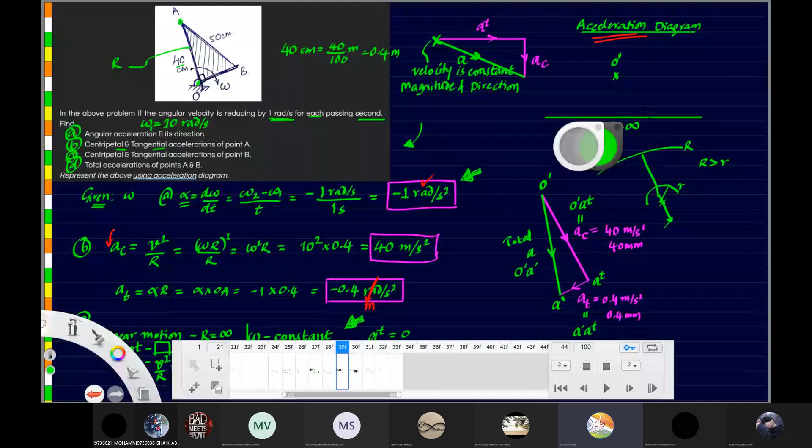Fine. So after lunch, is the strength very low every day? Only 10 or 9 students have joined. Yes, sir. Some students forgot that they have a class. Students don't know they have class. I've shared the link on WhatsApp.

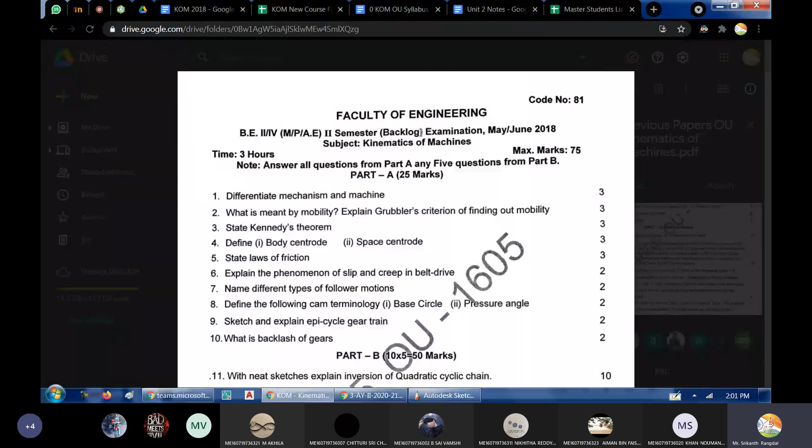Okay. So this is the question we are taking up from the question paper 2018 May June, and this appeared for backlog students. And considering this is for backlog students, the question is not that simple. Fine. You'll have to think properly, and only then you will be able to solve it. Let me take a snap of this question. You can see it's for 10 marks.

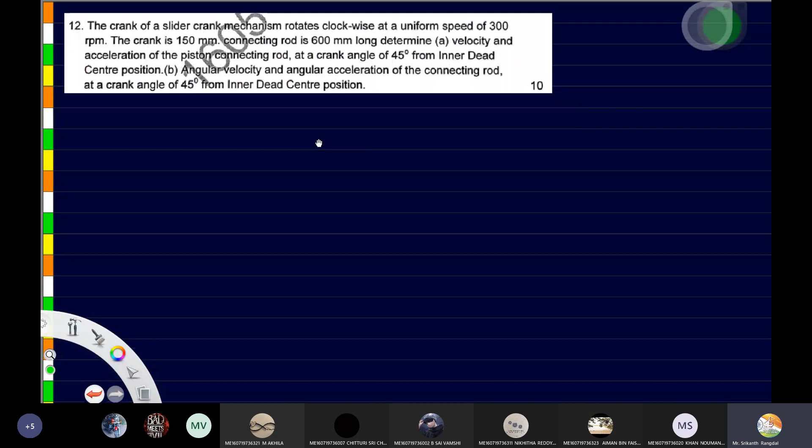So this question, I'll just keep it here. Okay. Remove these two things. Let me just push them to the corner. I'm not using them much. And yeah. So this is the question here. Ready? Needs just slightly to increase this thickness. Right. So what is given here? What is given here?

The crank of a slider crank mechanism. So you have already seen what a slider crank mechanism is like, right? There is a crank which rotates a complete 360 degrees, and this is connected by help of a connecting rod or coupler. It is connected to the slider. The slider will be sliding inside the cylinder. So this is how it will be connected, and the cylinder here will be fixed.

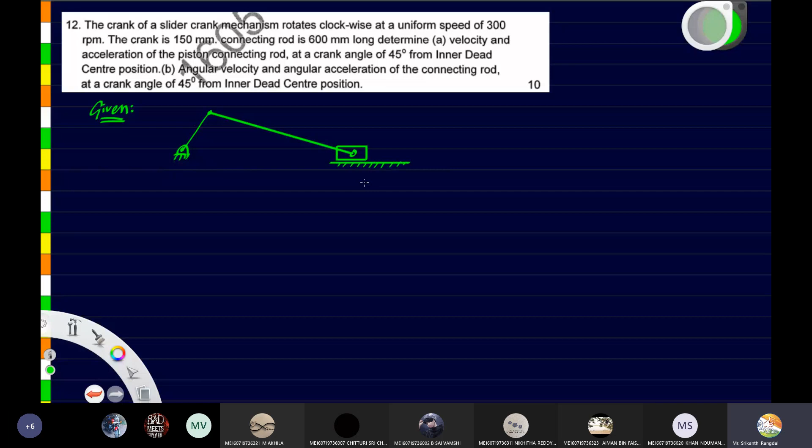So this is how we show the cylinder, and when you're counting the links, you have to count the fixed link as one. The second is the crank. Third is the coupler or connecting rod, and the fourth is the slider. So one is the cylinder, or you can also call it the frame, the fixed part. The second? Crank. The third is called coupler or connecting rod, and the last, fourth, is a slider. So this is how the slider crank mechanism looks like.

And then he's telling it is rotating clockwise. Clockwise means in this direction, and at a uniform speed of 300 rpm. So n value has been given, 300 rpm. Crank length has been given, the length of link 2. If you give the names of each point, I'll call this point S. So OA length has been given. How much is OA? 150 mm. And then the connecting rod or coupler, that is link number 3, AS, is given as 600 mm.

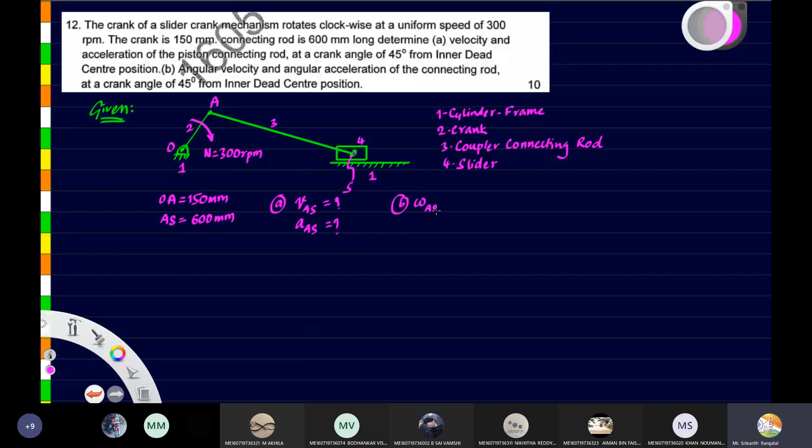And we have to find the velocity and acceleration of the piston and connecting rod. So we have to find velocity of A with respect to S and total acceleration of A with respect to S. These are the two things we have to find for the first bit. Second, he is asking the angular velocity and angular acceleration of the connecting rod. So for the B bit, omega for AS and angular acceleration alpha for AS. Okay, so this is the question. Did you understand? Any doubts here?

Now the angle at which he's asking us to do that is 45 degrees. So from here, the angle is 45 degrees, and at 45 degrees he is asking us to find these values. Okay, ready? Yes, sir. Okay, so we will again use the graphical method to solve it. Just open AutoCAD. Don't worry about the commands, okay?

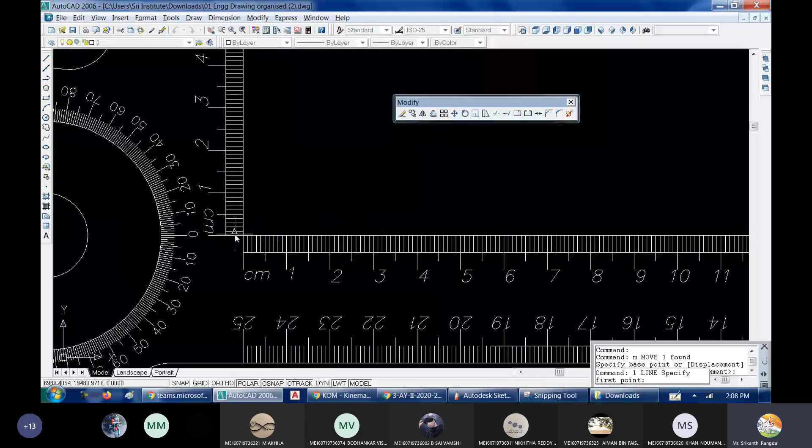Fine. So because you'll have to use the drawing instruments, I will just take up this drafter. Is this visible clearly? Yes, sir. Okay. So this is the one I don't want. Let me check the question once again. So this is our diagram. Let us start drawing it. First of all, I'll draw a horizontal line. Next, I'll have to draw this at what angle? 45 degrees, right?

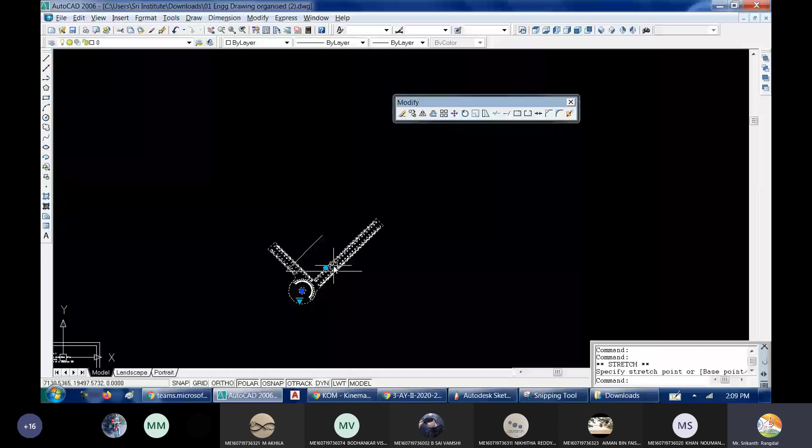So I'll take this drafter at 45 degrees. You can even use the protractor. Keep this at 45 degrees and draw a line. So what is the crank length? 150, sir. 150. So that means 15 centimeters I have to draw it. Correct? Now, because your paper size is not that big, instead of drawing that big a value, you can just scale it down. So when you scale it down, instead of drawing 15 centimeters, you can just make it.

You can just make it some other kind of 7.5. 7.5 is still large, actually. So what I'll do, let me make it 1/10. Or if 1/10 is very, very small, you can just make it 1/5. Okay, 1/5. So you can see here, I've taken this length 1/5.

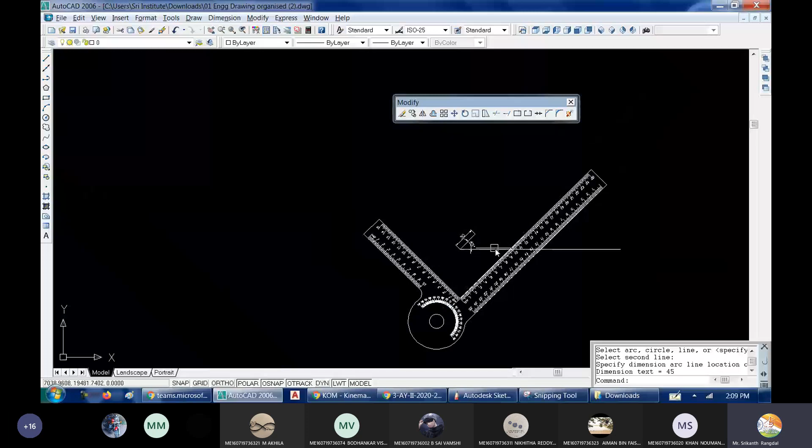So what I've drawn here is the crank length. Yeah, this is the crank length. At what angle? 45 degrees. And this is the crank angle. So now let me just take this. This point, let me call it O. So this is capital O here. This one here, I'll just call it A. So all this you have to do with your hands. Don't worry, you don't have to do it in a computer, right?

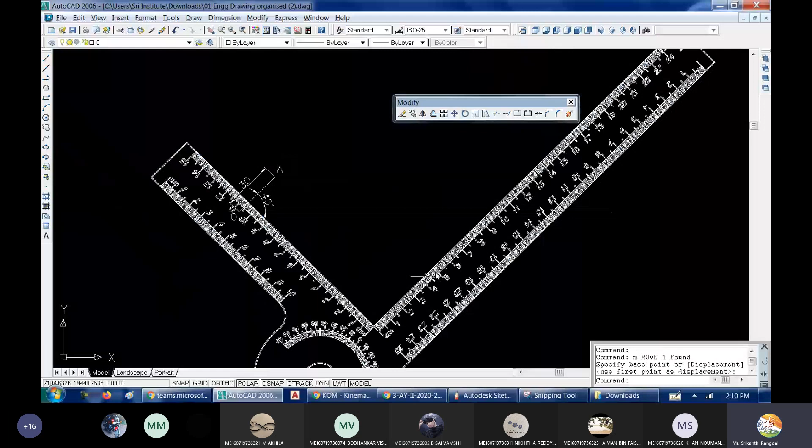So now, let me just keep this aside. This work is over. Now I'll have to take a compass with the length of the connecting rod. What is the length of the connecting rod? That is 600. So 600 by 5. What do we get? 120. That means 12 centimeters. So I'll take a circle at 120 radius. So this is what I'll get.

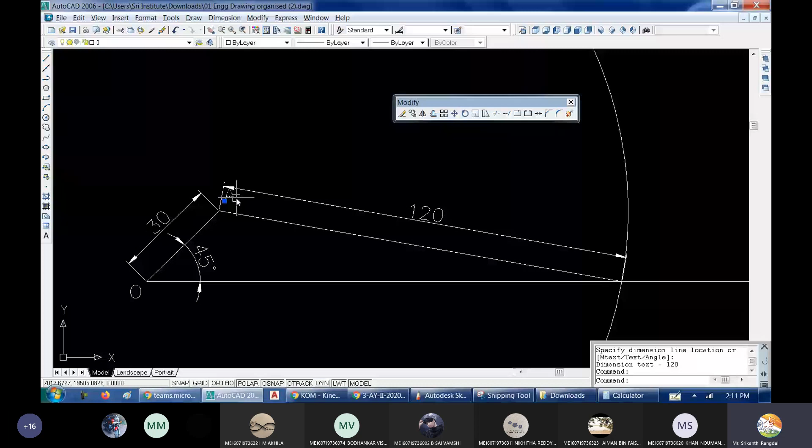So what is the length I've drawn? 120 is the length that I have drawn. But actually, how much is this? Actually, this is 5 times of this. 5 times means 600. 600 is the actual length. So this is where the slider is. Okay. So now we got the position diagram of our mechanism. We are now ready with the position diagram of our mechanism.

The next thing, what do you have to draw next? Velocity diagram. Okay. So next we have to draw the velocity diagram. So how fast is this rotating? Come on, tell me.

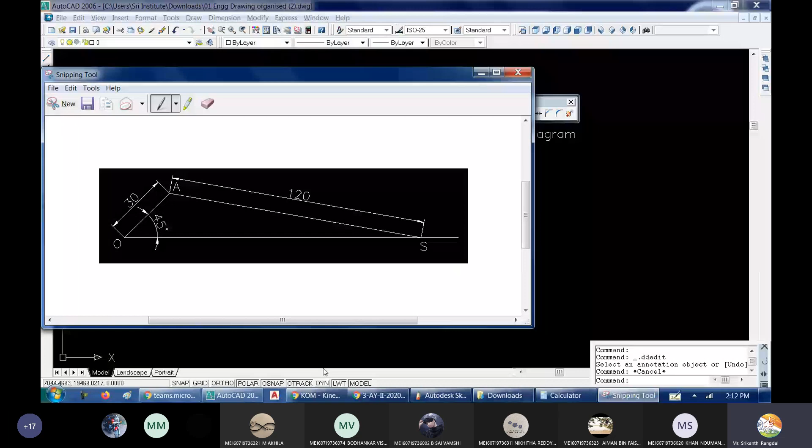Snipping tool. I'll take this diagram and let me make it slightly smaller so that it fits on the side. Okay. So now you can see that I've drawn this with instruments. So this is the exact diagram. So if I do any measurements on this, I will get exact measurements. So this we have to draw with instruments.

And then what is the speed? N speed has been given. N is how much? 300 RPM. But do we need N? No, we cannot use it, right? So we need omega. So what is the formula for omega? 2 pi N by 60. Very good. So now multiply this 2 pi into 300 by 60. What do we get? Calculate this.

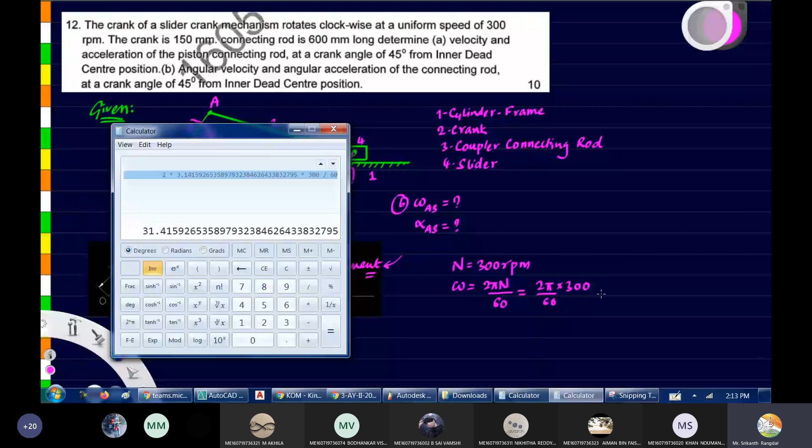Okay, let me take the calculator. It's available here in Windows. So 2 into pi into 300 divided by 60. I'll just take a rounded off value, 31.42 radians per second. So this is the value of omega. But N is given in revolutions per minute. Because of this minute only, we are dividing by 60. 1 minute has 60 seconds. So when we divide by 60, we will get per second.

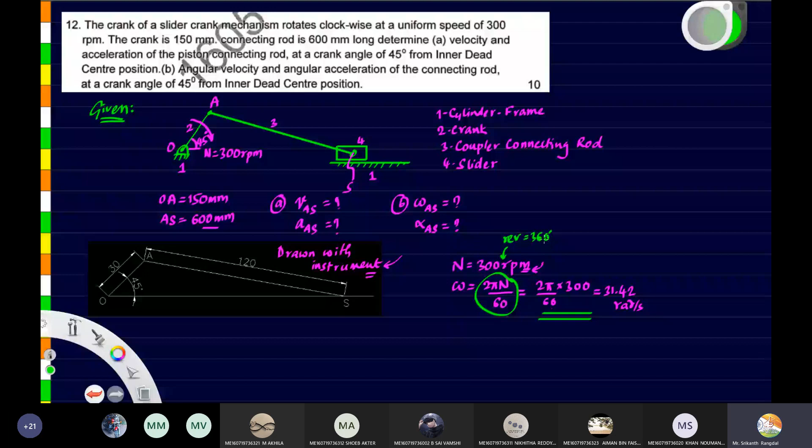So that's why in the previous class I had explained this formula perfectly. I knew this problem would arise. So when I explained this formula, I made sure to explain why we are getting 2 pi. One revolution means 360 degrees. 360 degrees is nothing but 2 pi radians. That's why in place of one revolution we get 2 pi, and in place of minute we get 60 seconds. So that's how it gets converted into radians per second.

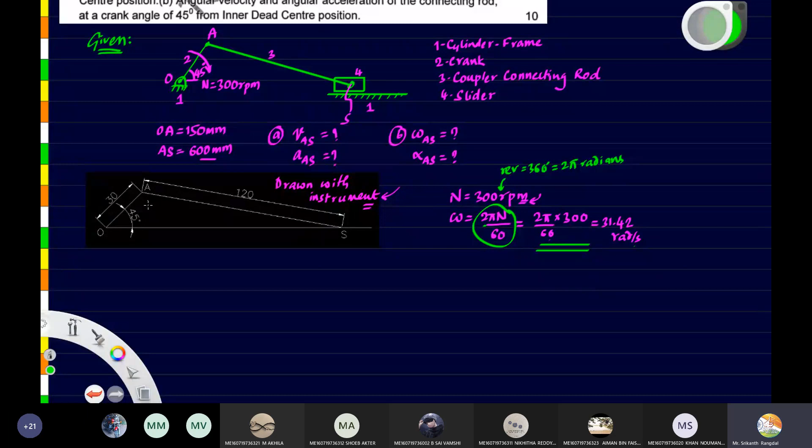Okay. So now that we know the value of omega, let us find the velocity of A. Let me take red color. Because it is rotating in this direction, the velocity of A will also be in this direction. This is the velocity of A with respect to O. Fine.

So let me find velocity of A with respect to O. How to find this? That will be equal to omega into OA, isn't it? What is the value of omega? That is 31.42 radians per second. And what is the length of OA? Here you can see OA length is given, but this we should convert into meters before using. So 1 meter equal to 1000 mm. Hence 150 mm equal to 150 by 1000.

So we get 0.15. So now this is radians per second into meters. We get meters per second. So what is the value? Calculate. What do we get? 31.42 into 0.15. 4.713. So 4.7, let us ignore the others. Meters per second. So this is the velocity of A with respect to O.

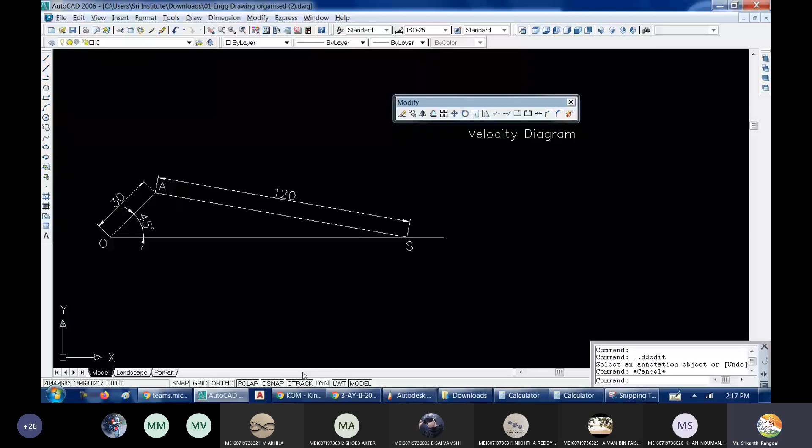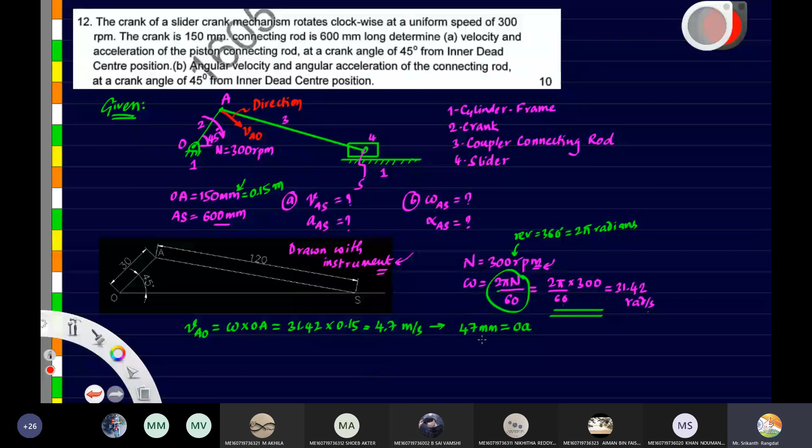So once again, I'll have to use this. First thing I have to do is I have to place it in the direction of the crank. Then this line will be perpendicular, right? So that perpendicular line I have to use. How much length we have to draw? 47 mm, so 4.7 centimeters. Let me take line. So from 0, 4.7. So this is 4.7. Let me move it aside.

Now from what direction to what direction it will be coming? It will be starting at the top. So starting upper point is small o and lower point is small a. So this is the OA length; we have to make it 47 mm. Let me show the dimension also here. So this is the velocity of A with respect to O, or in the diagram that is represented as length small oa.

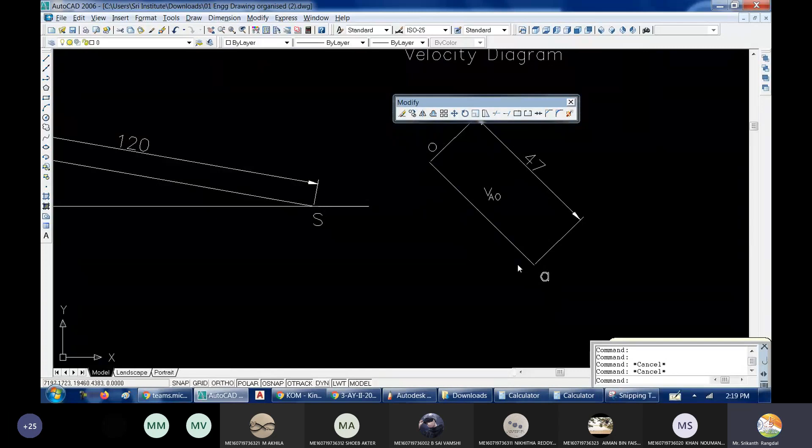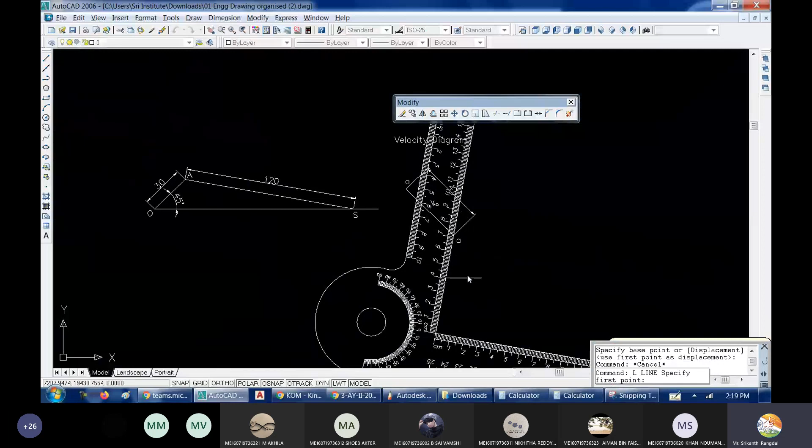Then what is the direction in which A moves with relation to S? That will move perpendicular to AS, right? So once again, I have to take this. Then I have to rotate and make this parallel to the connecting rod. Once it is parallel to the connecting rod, I need to use this length. So some point here I will take, and it should be passing through A. So now let me just draw some length.

So I've drawn this line. I don't know what is the length of this. I just knew the direction. And then what is the direction in which S is moving? S is moving horizontally, right? So here I have to draw a horizontal line. So now both these lines, they are meeting here, right?

So what is that intersection point? That intersection point is S, small s. In velocity diagram, always we use small letters. Actual mechanism use capital letters, and in velocity diagram use smaller letters. So this is what we are getting.

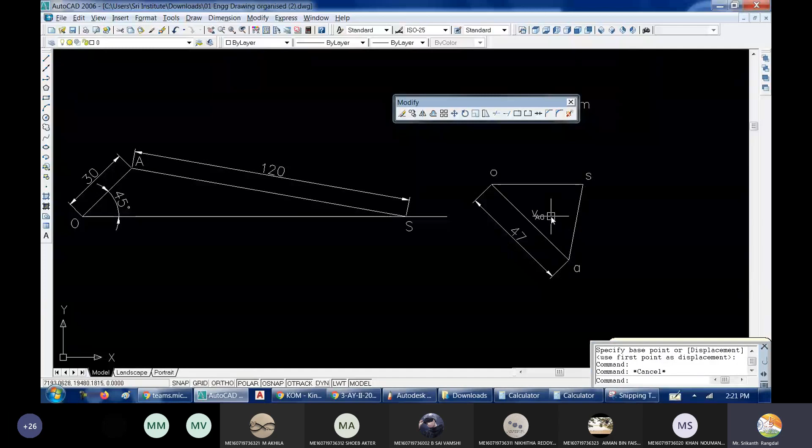Now, what does this length represent? Velocity of a with respect to s, or the reverse also is true: velocity of s with respect to a. So when you are writing velocity of a with respect to s, the direction we have to show differently, and when you are talking s with respect to a, we have to show it differently. So here you can see velocity of a with respect to o. So direction we have to show here like this. This is the direction for velocity of a with respect to o.

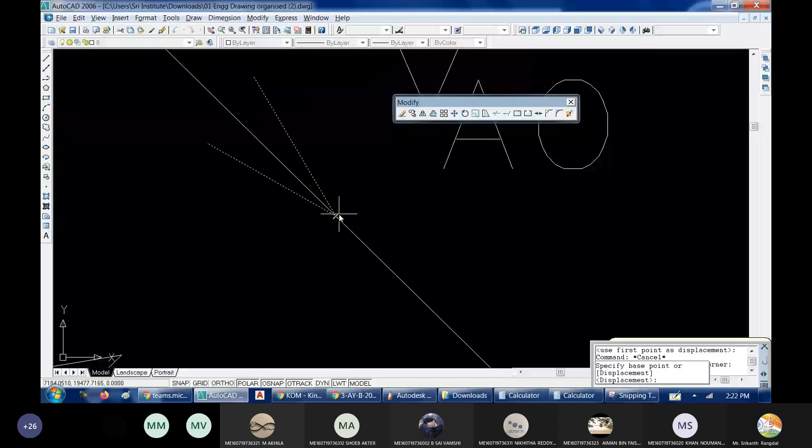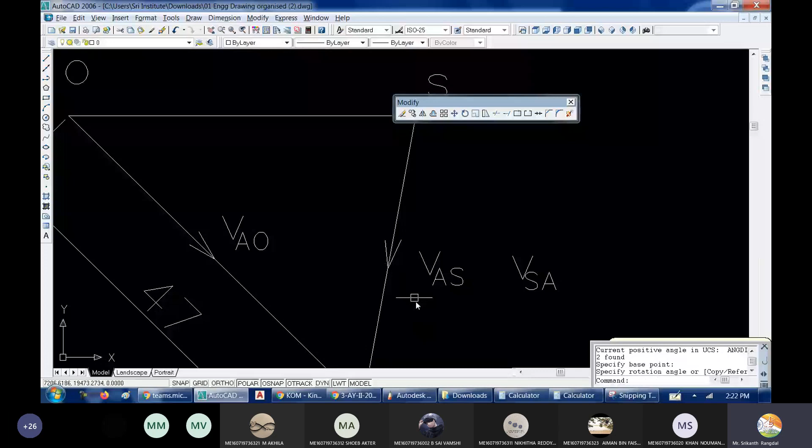So now applying the same convention, what will be the direction of a with respect to s? So it should move from s to a. Fine. So s to a. This is velocity of a with respect to s.

What about velocity of s with respect to a? Velocity of s with respect to a will be opposite in direction. Value will be the same, but it will be opposite in direction. And if you measure the length, you will get the magnitude.

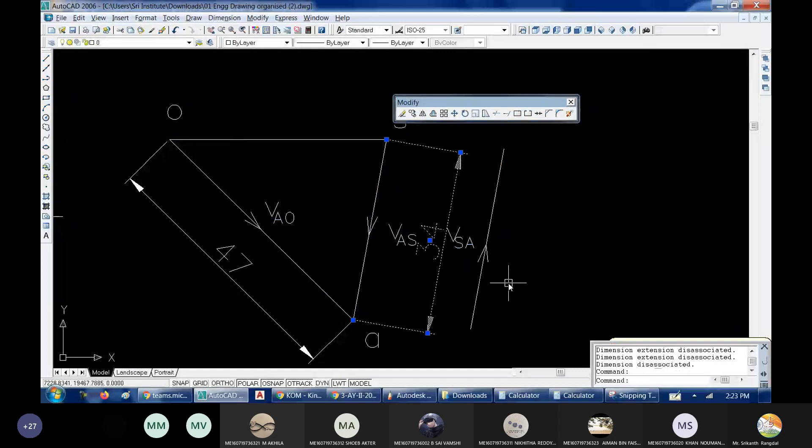Okay. So dimensions, so what I'll do, I'll just round it off to the nearest 0.5. Which style is applied here? This is ISO 25. So ISO 25, I'll have to modify, round off to 0.5. Okay, so 34 we are getting. So velocity of a with respect to s is 34.

And what is this? So I'm again and again telling you, you don't have to worry about all these commands that I'm giving. You don't have to remember the commands. You just watch what I'm drawing.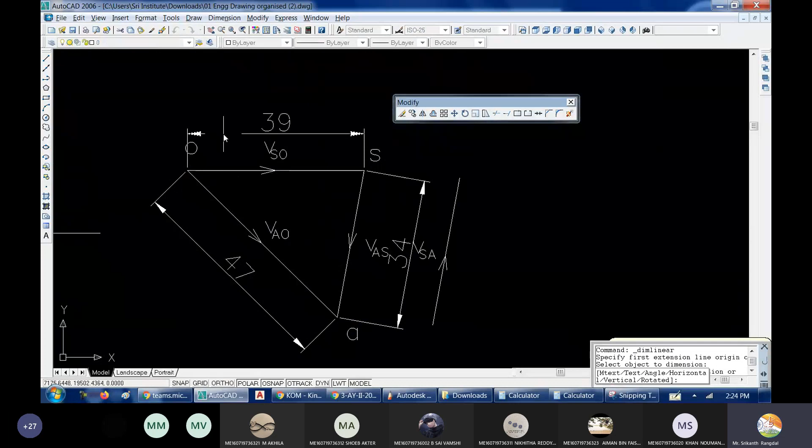So this is a horizontal line from O to S. So this is velocity of S with respect to O. So if you want to find the velocity of S with respect to O, measure this length. Fine. So in this case, I am providing the dimensions directly.

If you don't want to use dimensions, of course, in real life, you will not have dimensions. You'll have to use the scale. So keep your scale here at the beginning, and you just have to measure till what value it is coming. So you can see this is 39.

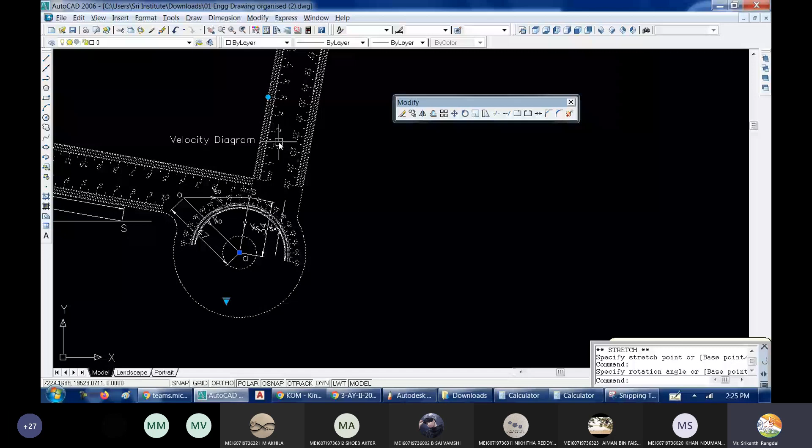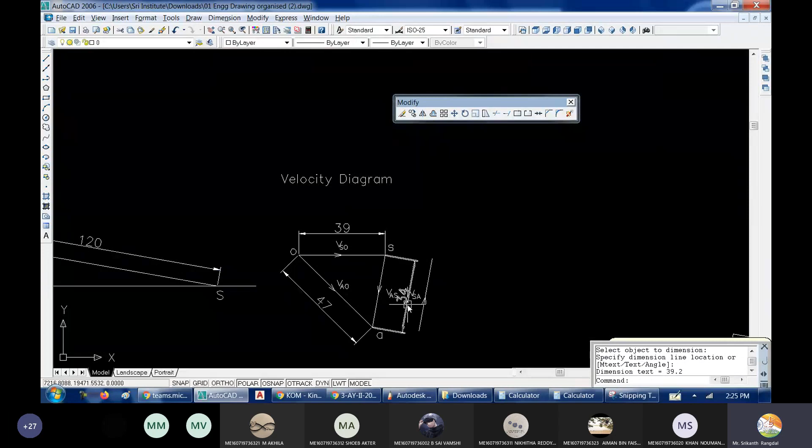Same way, if you want to measure the other value, you have to take this, keep here, rotate it, keep it in this direction properly, and measure it properly. Are you getting it? So it is coming up to here. So this is 34. So with dimension also we are getting the same, right? I've rounded it off to the nearest value. So this is 39 and 34.

So now let's take this velocity diagram. Let me move this to the other side. I'll just take a snap of this and let's place it in our column. Fine. So in the exam, you may be provided with an extra sheet to do this. Fine. So this is what we got.

Now we can find the velocities. So first take the green color. Velocity of A with respect to O. What is the velocity of A with respect to O? First, here we are getting the length AS. So AS length is 34 mm.

Now from this we have to get back meters per second. So for getting this, what did we do? We multiplied by 10. So when you want to come back, you have to divide by 10. So now divide this by 10. We get 3.4 meters per second. So this is the velocity of A with respect to O.

Then the same we have to do for velocity of S with respect to O. So small OS is the length. The length is 39 mm. So now we have to get back the meter per second value, so again we divide this by 10. So 39 mm divided by 10, we get 3.9 meters per second. So these are the two velocities we got.

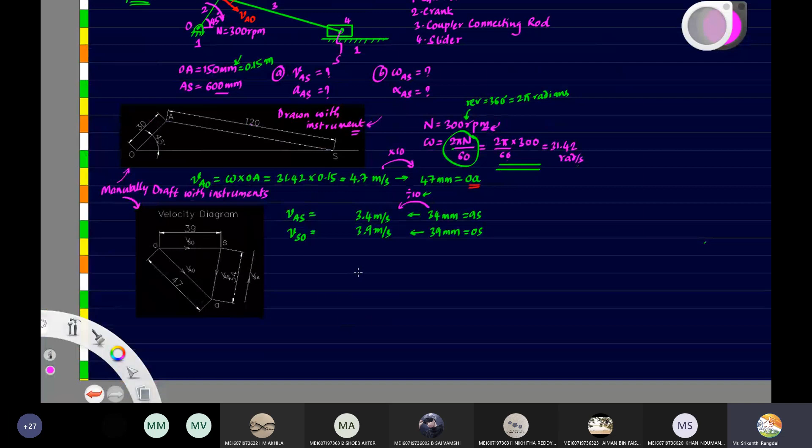So velocity of A with respect to O and velocity of S with respect to O, both we have found. Now with these values, can we find any of the answers? The first value we have already found. So the first value is clear. And can we find this value, omega of AS?

Can we find omega? Divide by n? Divide by... yes. So omega AS is V of A with respect to O divided by AS. Okay. So the formula for V I had already told, omega into R is the value. R is nothing but the radial distance. So here the radial distance is AS. Okay. So now use this value 3.4 meters per second divided by AS.

AS, what is the length? What is the length of AS? Here it is coming 120. 600. But we should not use this length when you are talking here, right? So we should use its actual length. Actual length is 600. And that too, we should convert it into meters. So 600 divided by 1000 we have to do. That is 0.6. So 0.6 we have to use here.

So what do we get? 3.4 divided by 0.6. What do we get? 5.67. 5.67 unit, radians per second. Fine, radians per second. So we have got half of both the bits. So here A bit half, and here, sorry, here B bit half. Okay, A bit half, B bit half, both we got it.

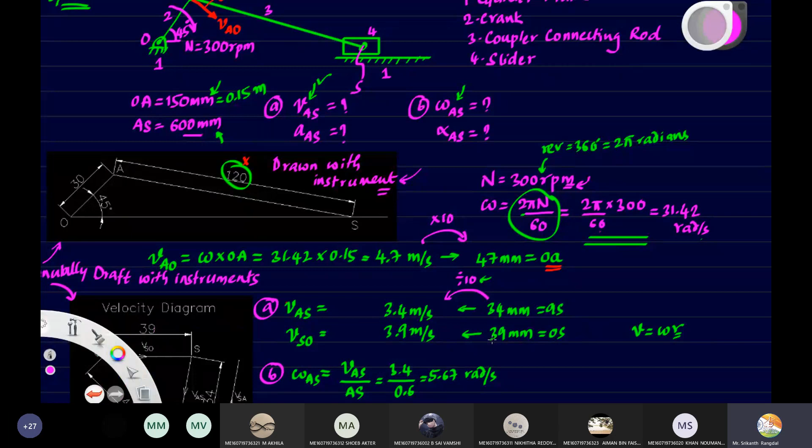Next, we have to go ahead with the acceleration. And acceleration is slightly more complicated. Shall we start? Okay, let's go back to our diagram, the sheet. And now we have finished with the velocity diagram. Next, we have to take up acceleration diagram. Okay, ready? Acceleration diagram we have to take up next.

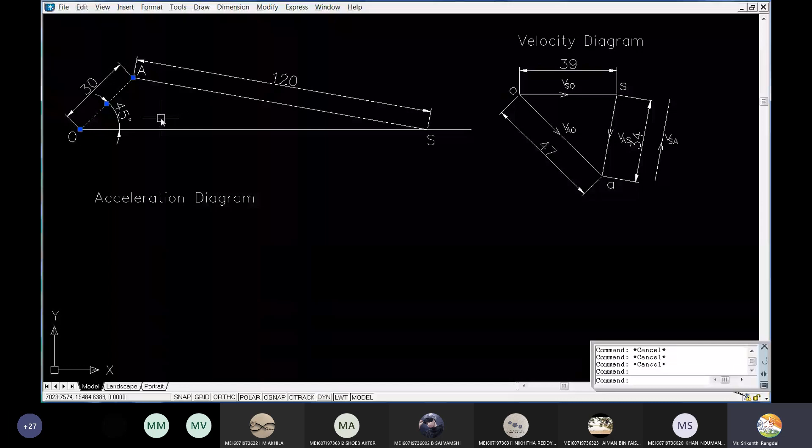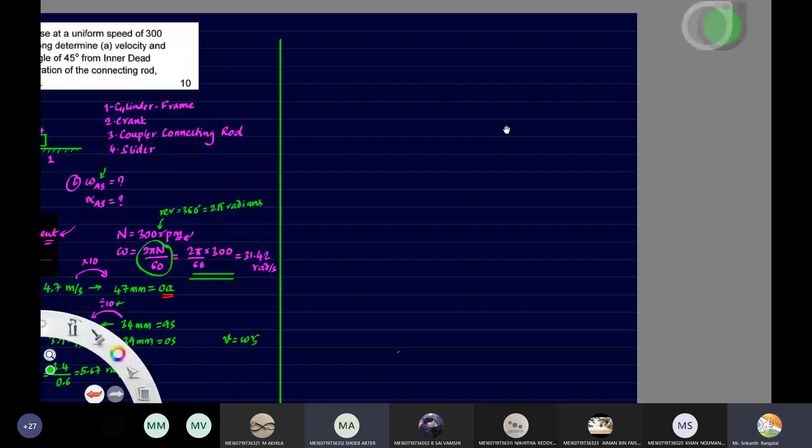So once again, now this link here is moving with constant velocity. The crank OA is rotating with constant velocity. So which of the two accelerations are zero here? Tangential. Sure. So crank is moving with constant value of omega. Now tell me the formula for AT and AC. What is tangential acceleration formula? V minus U by T, or dV by dt.

Or I had told you one more formula, that is alpha into radial distance. Fine. So here, because omega is constant, alpha is d omega by dt. So d by dt of constant value is 0. So now because alpha value is 0 here, 0 into anything will become 0. So tangential acceleration will become 0. I'll just call it tangential acceleration of A with respect to O, this relation becomes 0.

Now what is the formula for centripetal acceleration? Centripetal acceleration is V square by R. Or what is the other formula? Omega square into R. Okay. So do we know the value of omega? We know the value of V as well as omega, right? So which velocity we have to take here?

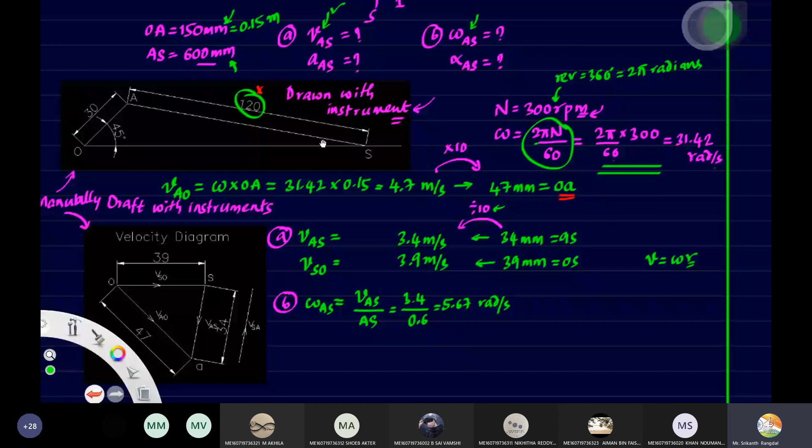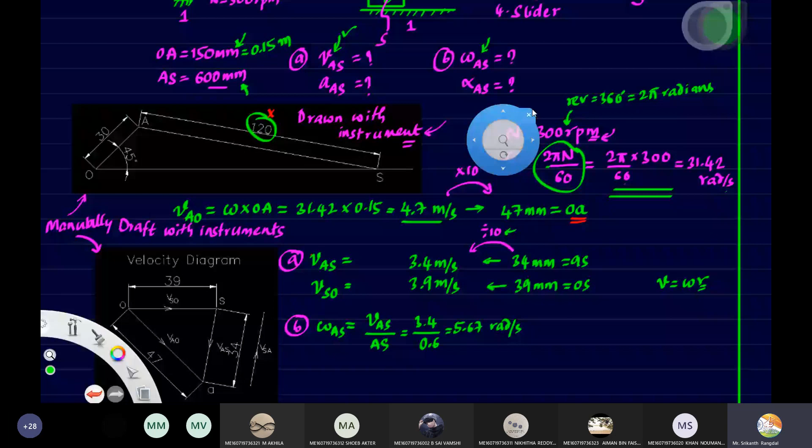Velocity of A with respect to O. Or else omega we have already found it directly, right? So that omega value, let us use it here directly. And when we use omega value directly, we will get velocity of A with respect to O. That value also we already know it. So let us take this value directly here. So which acceleration we need here? We need centripetal acceleration of A with respect to O.

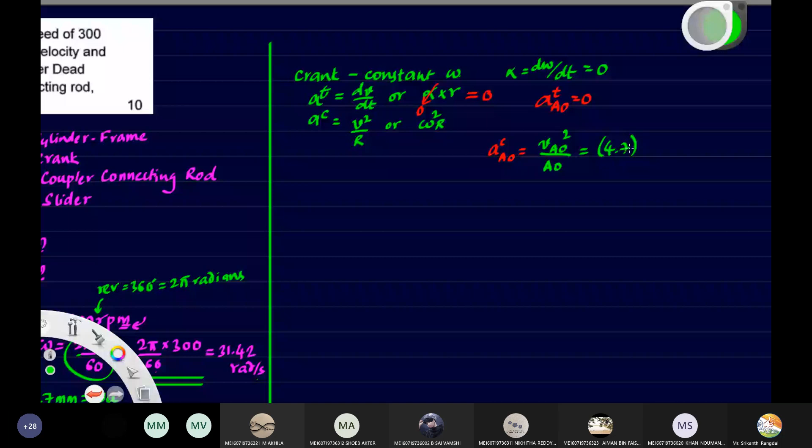So now the formula here becomes velocity of A with respect to O square divided by AO. So what is the velocity of A with respect to O? 4.7 meters per second. Square of this divided by AO length. What is the length OA? How much? 150.

150 mm. Again, I told you 150 mm we cannot use it directly. You should convert this into meters. So 0.15. Calculate what we get. 4.7 into 4.7 by 0.15. That is 147.3.

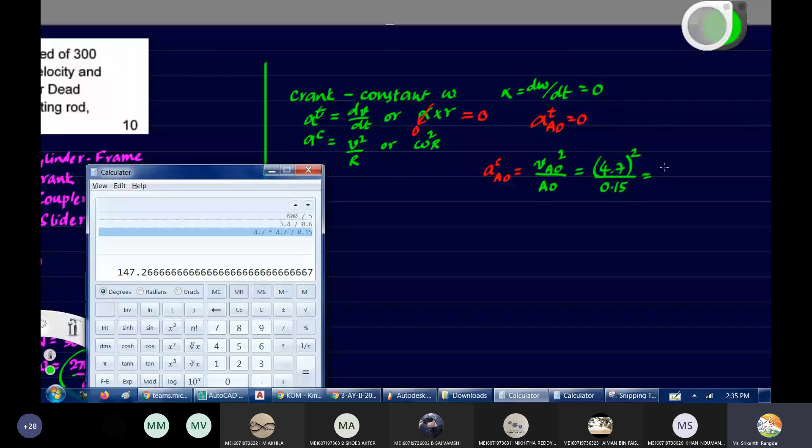147.3. So what is the unit of this? Meters per second square. So the total acceleration of A with respect to O will be the sum of these two, tangential acceleration plus centripetal acceleration, and this sum is a vector sum. Because this value is equal to 0, the total acceleration will be equal to only the centripetal acceleration of A with respect to O.

So this we have to now draw here. This value, how much are we getting? 147.3 meters per second square. So when we draw it, 14 centimeters we have to draw. Can we draw 14 centimeters on the sheet easily? No, sir. So it becomes difficult, right?

So what we'll do, this 147.3, we will assume this to be 50 mm. And whatever scale is there between these two, the same scale we will apply when we are converting the values back from the diagram. Okay. Let's begin.

So here, once again, I have to start with a point. What is this point? That point is O dash. For acceleration, I told you we'll be using a dash so that we can identify the difference between velocity and acceleration diagrams, to avoid confusion. Now, O dash, we got it here. Which acceleration do we have to draw? Centripetal acceleration.

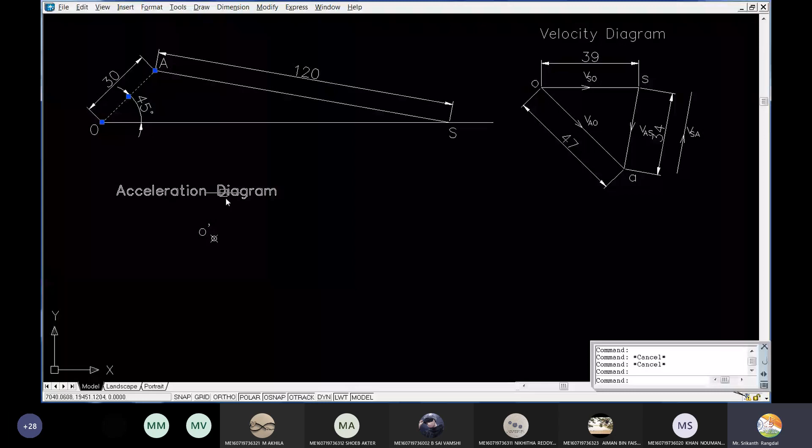What is the direction of centripetal acceleration? Towards the center. Towards the center means towards O, from A towards O. So I'll just take a line parallel to this. How to take a parallel line? I'll keep this here, keep this parallel, and then move this. Let me take a point over here, and then draw the length in this direction.

How much length did we decide to draw? We decided to draw 50 mm. From here in the downward direction, let me draw 50. So 50 length I have drawn, right? So what is this point? O dash, A dash. So the bottom point will be A dash.

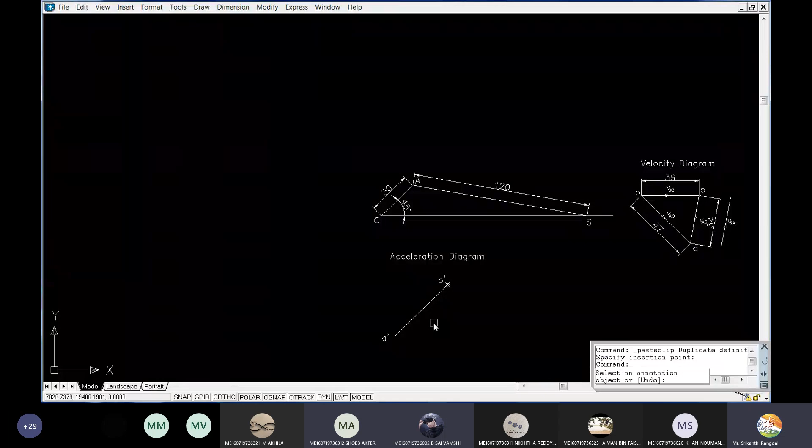Why? You just now told centripetal acceleration is towards the center. So from A towards O it should be, right? So the direction is downwards. Are you getting it? Let me show the direction now. Direction should be downwards. Are you getting it? Sir, I understood the direction but unable to understand the labeling.

You see, while putting the arrow, when we are naming the points, we should name them in the direction of the arrow, not the direction of displacement. Of course, when you look here, O is below A. That is irrelevant when we are drawing the acceleration diagram. In the acceleration diagram, we have to see the direction of acceleration. At O dash it is beginning, and from there it should move downwards. So based on this arrow, we have to put the next name.

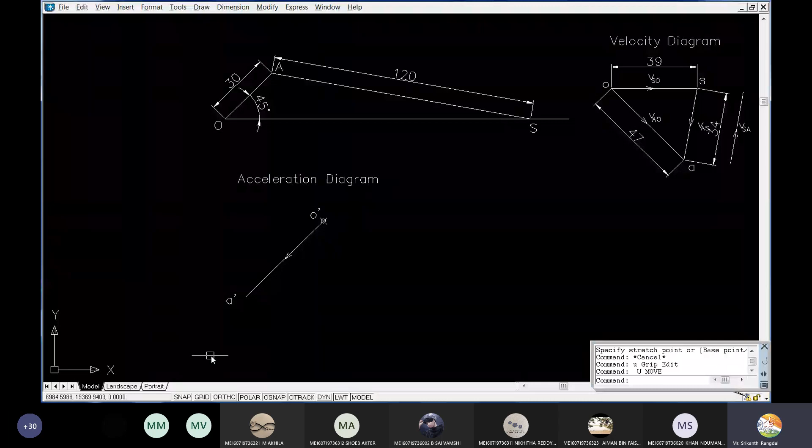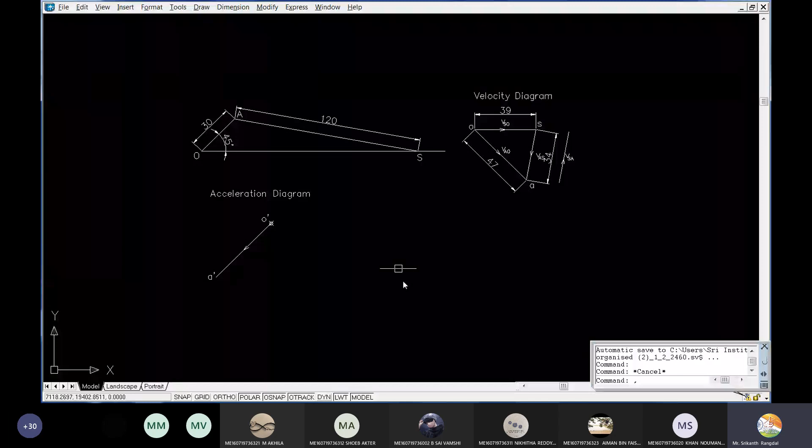So if the acceleration is upwards, then the arrow will come above this, and the point will come here. But this is not the case. The acceleration is in this direction, hence it is coming downwards, and the next point is coming here. Is this clear? No, sir. Still confused? I told you how to get the directions, right? Yes, sir, I understood the direction, but the naming was confusing.

You took the upper point O dash, and the lower point A dash. You see, when you are naming, you have to take the start and the finish. The direction is always from start to finish, and naming should be done from start to finish. The starting point is the fixed point O dash. The ending point is A, so A dash.

Okay. This is how the naming should go. So this is how you remember it: start point, ending point, so from start to the end. The start point is the fixed point O dash. A dash is moving, so A dash will come at the bottom. Of course, it's on this side, but I've drawn it on the other side. You can understand, I hope. So this is how we draw it.

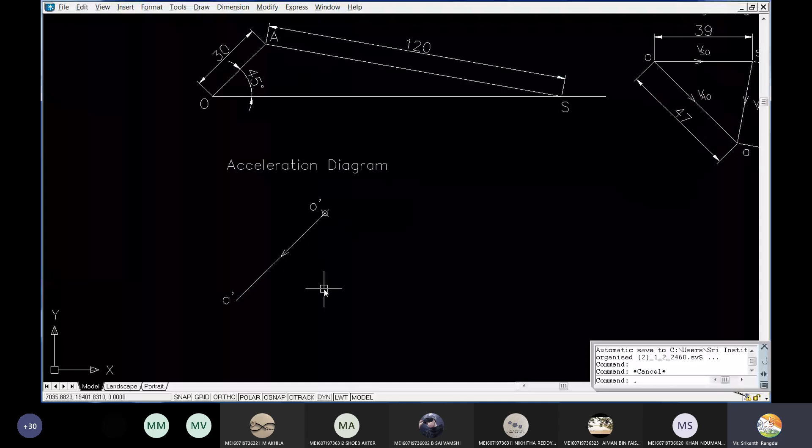Now the next thing is complicated. This rod will have some acceleration, right? That rod will have both the accelerations, the centripetal acceleration as well as the tangential acceleration. So which of the two accelerations can we find here?

So when we are talking about the connecting rod, both centripetal and tangential accelerations will be there. When we are finding the accelerations, we have to find accelerations of S with respect to A. So what is the formula for centripetal acceleration again? Velocity square by radius. Which velocity do we take? Velocity of S with respect to A, squared, divided by length SA. This is what we have to take.

And tangential acceleration, how to find it? Alpha into SA. Alpha of SA into SA. So which of the values are known here? Tell me, which values do we know?

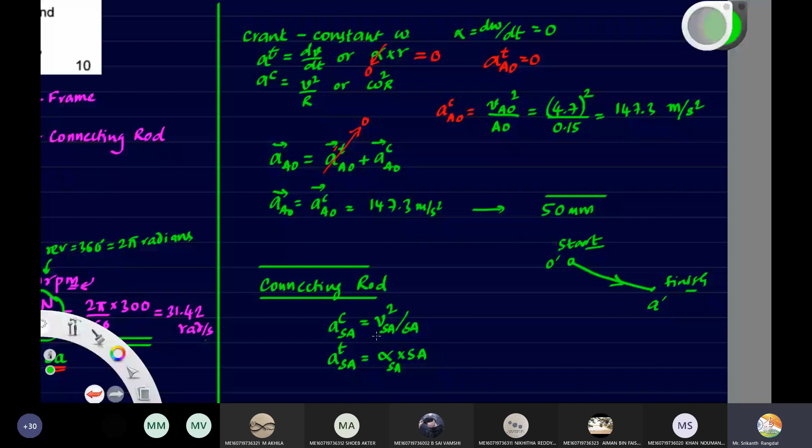Do we know velocity of S with respect to A, or velocity of A with respect to O? Both are equal and opposite. Here I have shown you, this is downwards, this is upwards, but the length of both is the same, 34. So we know the value of velocity of S with respect to A. And we also know the length SA, which is nothing but the length of the connecting rod. So we can find this value. Let us find it.

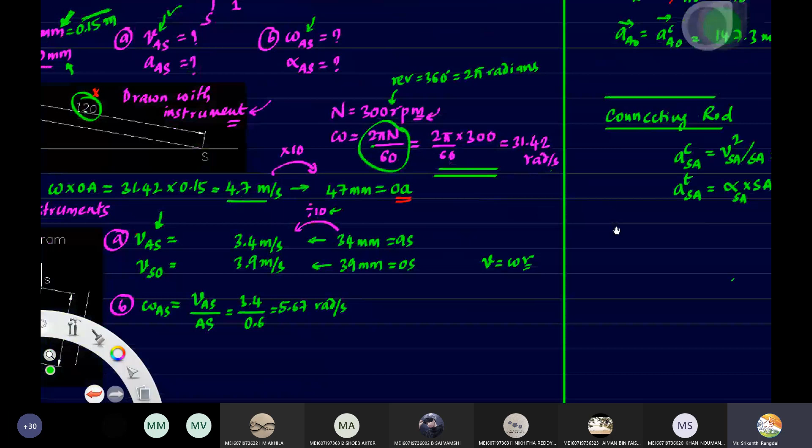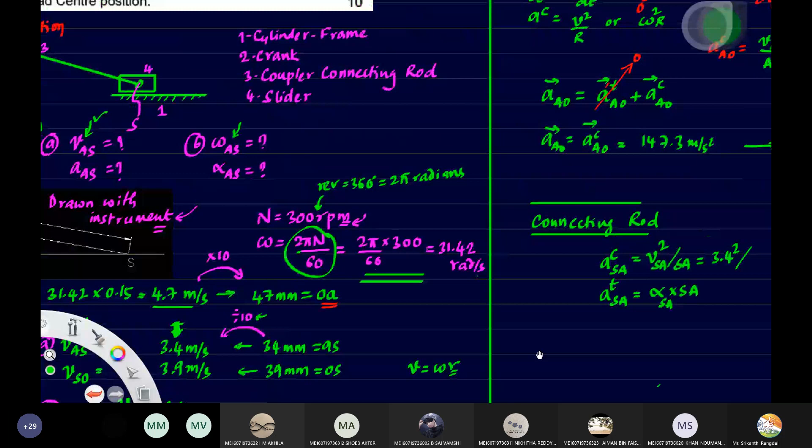So the velocity of S with respect to A is 3.4. So 3.4 square divided by SA length. SA length is nothing but 600, and we have to write it in meters as 0.6. So 3.4 into 3.4 by 0.6, we're getting 19.27. The unit of this is meters per second square.

When we are converting this into the diagram, we have to apply the same ratio. The ratio here is 50 divided by 147.3. Because we are taking a single decimal, let's take 19.3 and forget the 7. So multiply the same ratio: 19.3 into 50 divided by 147.3. We get 6.5. So it's a common factor.

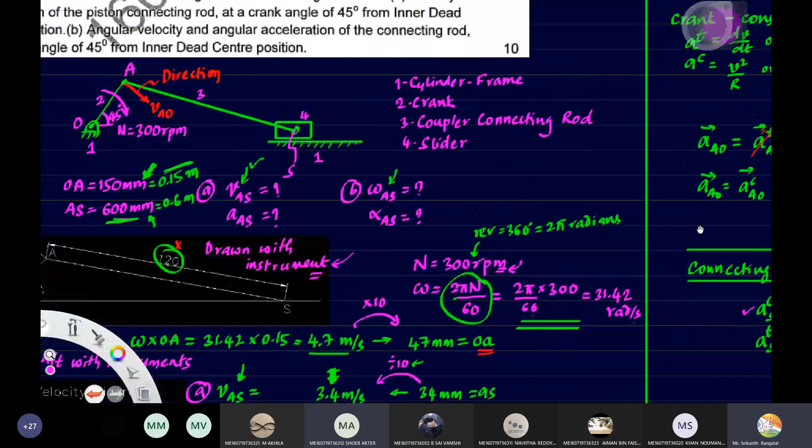Now what is the direction of this? Towards the center. So what is the center here? A is the center or S is the center?

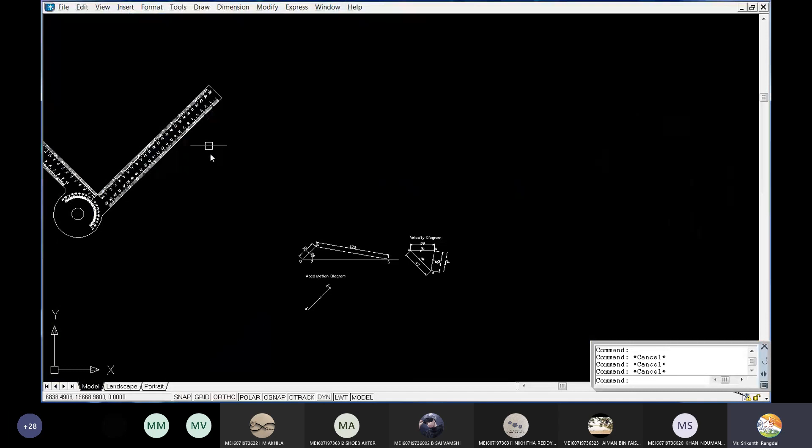Fine. So when we are drawing this length, 6.5 mm, we have to draw it towards A. We have to draw towards A. So our direction will be upwards like this. This is our direction. And this direction is parallel to OA. So let us go back to our diagram and draw it. So parallel to OA, let me keep this drafter parallel to OA first. Ready? And now we have to go in this direction.

So let me keep this zero value here. And what is the length I have to take? How much length I have to take? 6.5 mm. Okay, so 6.5 mm. So I'll start here. This is 6 mm, and in between I have to take. Right? Okay. Just nearest. So this is 6.5. Okay, 6.5 I've taken it. So now let's move this aside.

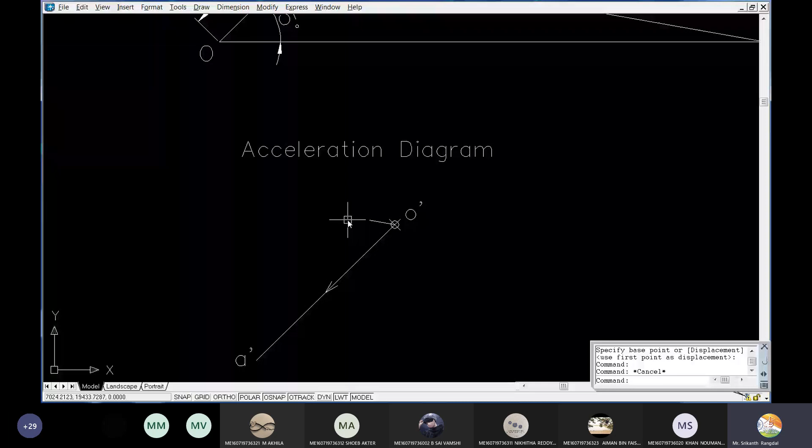So this small length, what is this length? This is acceleration. Which acceleration is this? A with respect to O, centripetal acceleration. This is centripetal acceleration. And when both the accelerations are there, how to draw the acceleration diagram? We have to draw them light. Centripetal and tangential, both we have to draw light. And the final acceleration, that is what we have to make dark. So only one part of the total acceleration we got.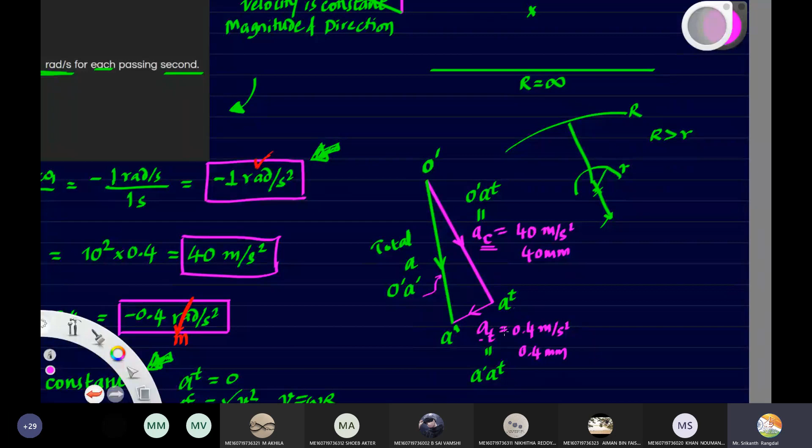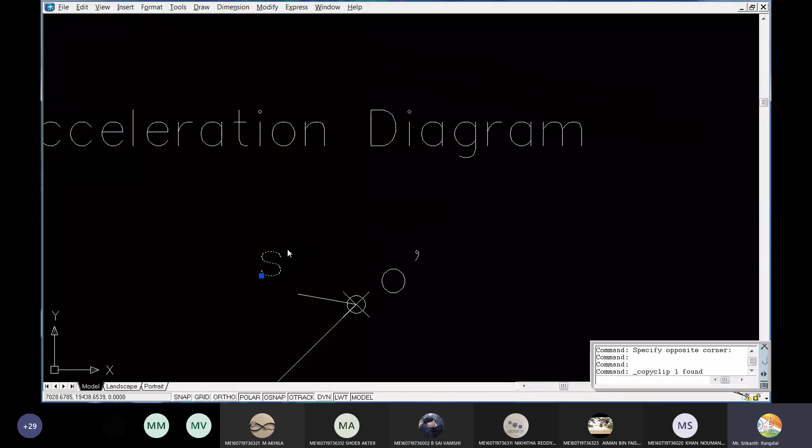And this is a temporary point. We have to name it. So how to name the temporary point? This is the temporary point for S. So I will call it S subscript A. Of course, a dash also can be put just to avoid confusion. S A dash. Fine. Let me reduce the size of this. So this is the temporary point.

Next, we know the direction of the other term. What is the direction of the other term? Back to our problem. So what is the direction of this? Direction will be perpendicular to AS. Perpendicular to AS. Okay. So the direction of this you have to take perpendicular to AS. So once again you can see this is already placed parallel to this.

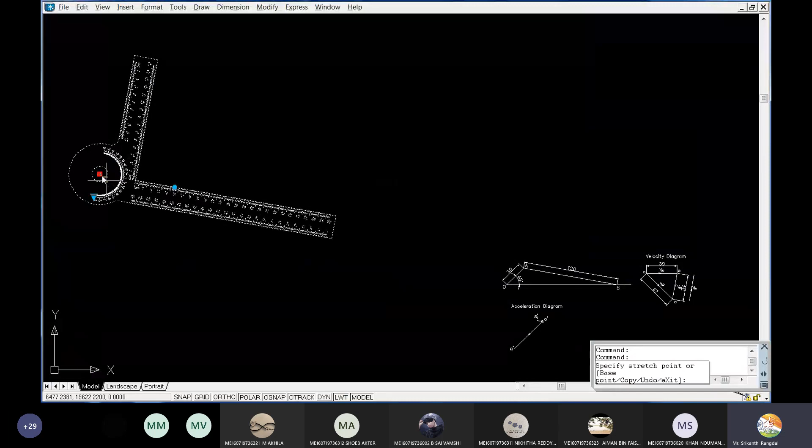Now again let me take some length here in the middle. So 10 value I will hold and I'll keep it here. Fine. So this is the line I have to take. Keep it aside. So this line here is the direction of tangential acceleration. But we don't know the value of tangential acceleration. Do we know it? We don't know. So we'll have to keep it as it is.

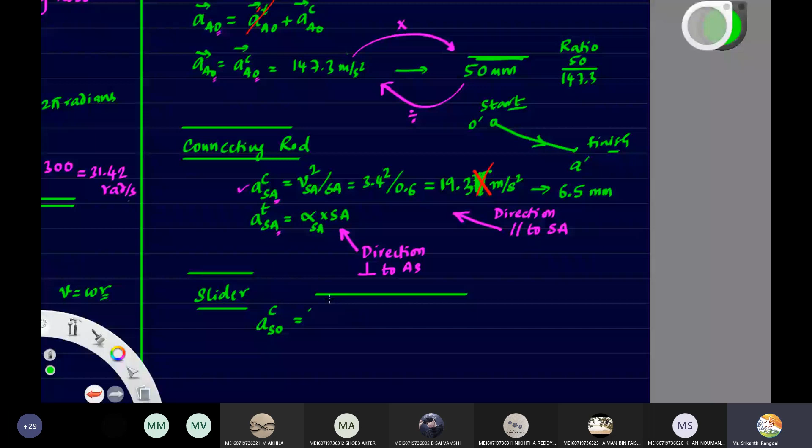Okay. Next, let us go for the third part. What is the third part? The slider. Now in the slider, what is the centripetal acceleration of slider with respect to O? The slider is moving on the plane surface, right? So when it is moving on the plane surface, velocity is linear. When the velocity is linear, what is the radius? Radius is infinite. So V square by R, we get some value by infinity, which is 0. So the centripetal acceleration will be 0.

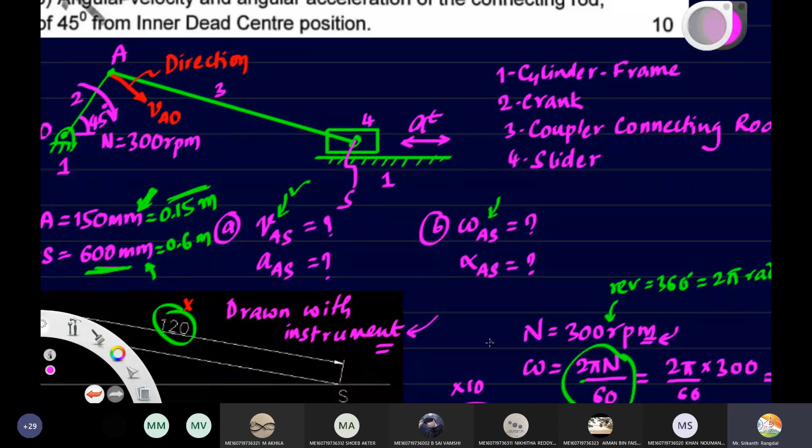And we will just be left with tangential acceleration. So how to find tangential acceleration? It will be dv by dt or alpha into SO. We don't know both of these, right? But we know the direction. What is the direction of tangential acceleration? Direction is horizontal, isn't it? Because the slider always moves horizontally. So the tangential acceleration will be horizontal only. Even though we are unable to find the value, we know the direction at least.

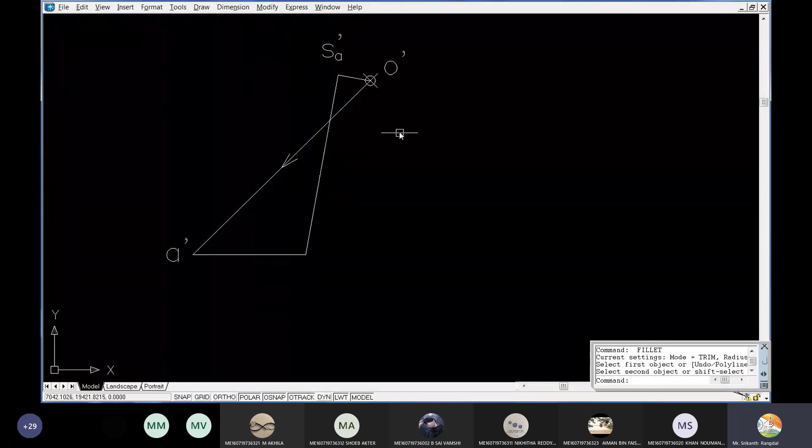Now the A point we already know is here. So from here, let us draw a horizontal line, and they are both intersecting here. Fine. So this intersection point is what we want. So what is this final point? This is S dash. Is it clear?

This is S dash. Fine. So these two lines, we'll have to draw them as dashed lines. And this line here gives the total acceleration. Is it clear? Yes. So this is the total acceleration. So this is the acceleration diagram.

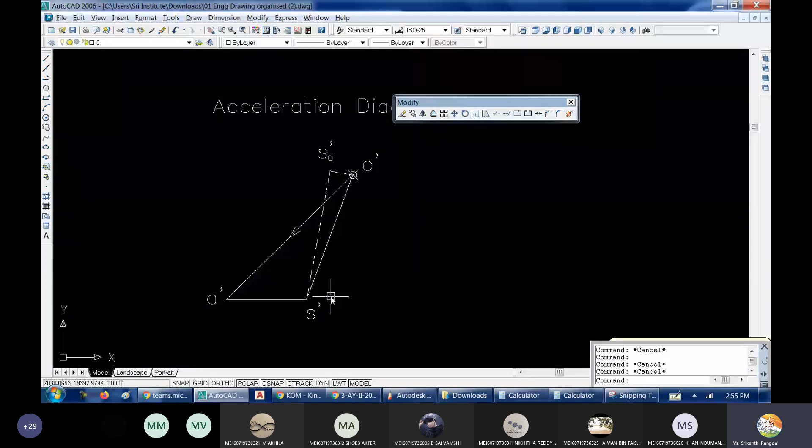Okay. So now what do you want to find from this diagram? Depending on what you want to find, you'll have to measure the distance accordingly. The acceleration diagram is complete. Let me take a snip of this and I'll place it here in our diagram. So I've placed it here. Fine. Now, which acceleration do you want to measure?

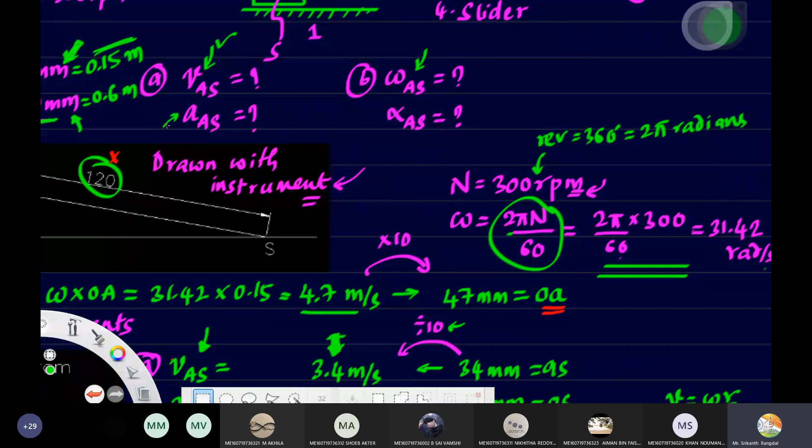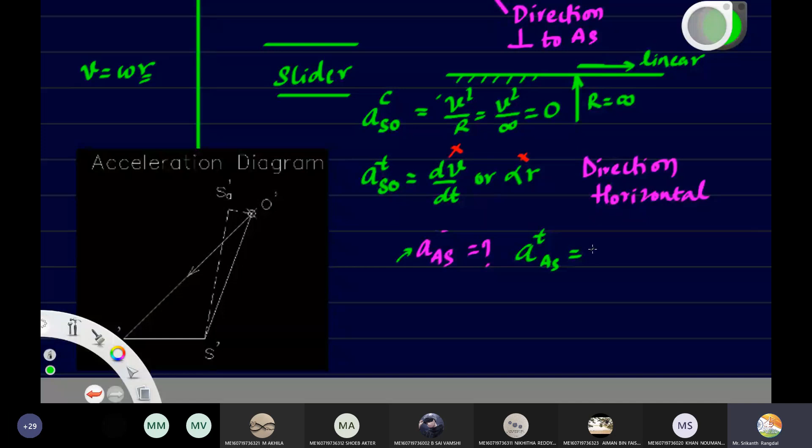So, what is asked in the A bit? Acceleration of A with respect to S. This is what is asked, right? Can we find this? What is the formula for acceleration of A with respect to S? This will have only tangential component of A with respect to S. And how much is that in the diagram?

In the diagram that is nothing but A dash S dash. So we'll have to measure the length A dash S dash. How much is A dash S dash? This is 22.5 mm. So now we are moving backwards. We have to divide the ratio. What is the ratio for acceleration diagram? Here is the ratio. So 50 by this. So we have to divide that.

So let's take the calculator. 22.5, divide by 50, into 147.3. We get 66.3. You're getting it? 66.3. And what is the unit here? Meters per second square.

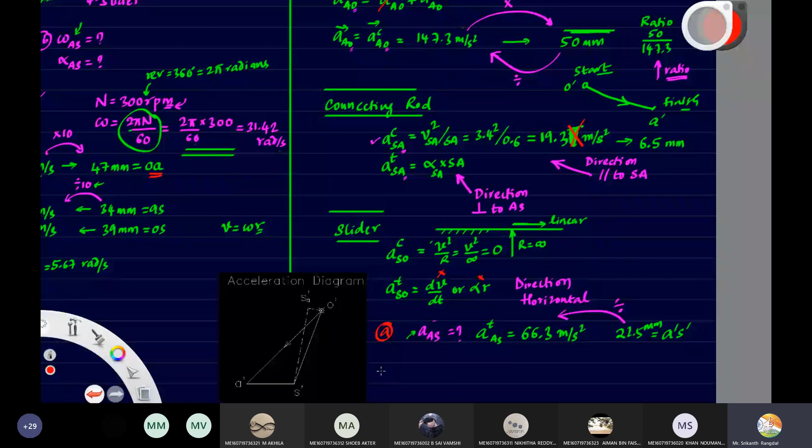So here we got the second half of A bit. Then second half of B bit. What is it asking? It is asking this value, right? So what is the formula for this? Angular acceleration of AS. It will be equal to the tangential acceleration of AS divided by AS, isn't it?

Because we have seen A equal to alpha into R. So alpha equal to A divided by R. So here A is nothing but the tangential acceleration of A with respect to S, and R is nothing but the length AS. So what is the tangential acceleration? Did we get it? Yes. So we got this here itself. Let us substitute that here. Is it correct?

Wait a minute. Tangential acceleration of AS. Sorry, I think I made a small mistake. The value that we found just now, A dash S dash. That should be from the horizontal, right? There's a small mistake. Anyway, let's proceed with what we have taken.

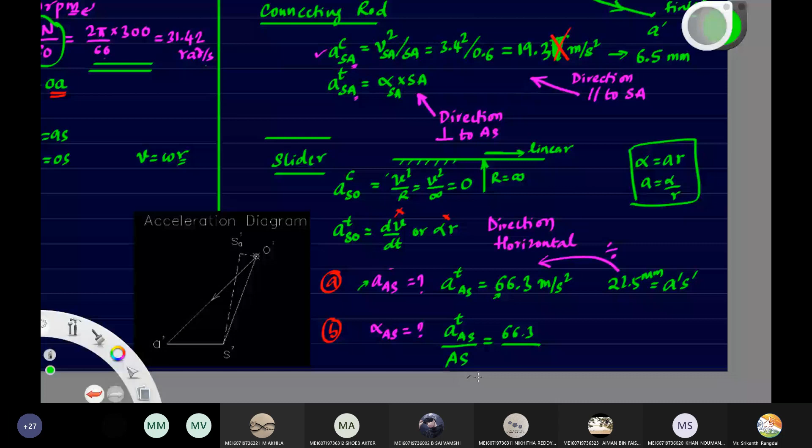So this tangential value, you take it 66.3 divided by AS. What is the length AS? AS is 0.6, right? So 66.3 divided by 0.6. 110.5. So this is in radians per second square. Okay.

So you can see the problems are very complicated. You'll have to use a combination of hand drawing with instruments. Whatever measurements come from the diagram, you'll have to use in the calculations. Whatever values you are calculating, you have to use in the diagram. Both to and fro, you'll be using continuously. Is there any doubt here?